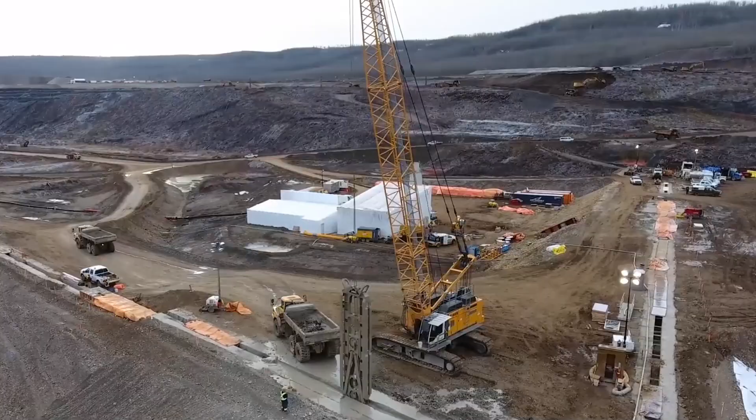Did you know that the Site C Dam in British Columbia is set to reshape an entire valley and flood over 5,500 hectares of land, all in the name of clean energy? This $12 billion megaproject will harness the power of the Peace River to generate 1,100 megawatts of renewable energy, enough to power 450,000 homes or over 1.7 million electric vehicles each year.

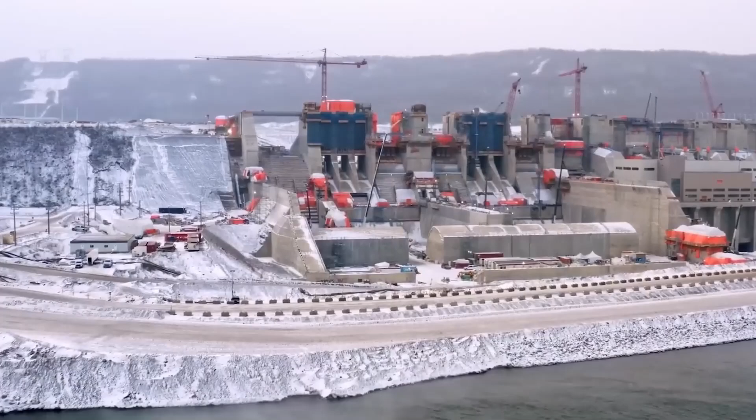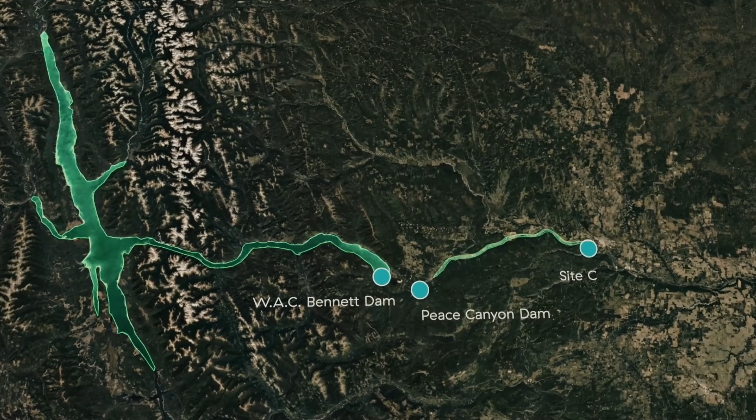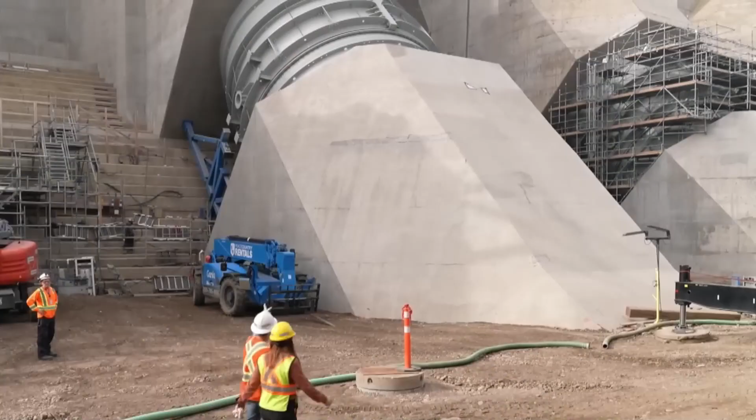It's one of Canada's largest infrastructure projects, involving nearly 4,800 workers and the construction of a massive earth-filled dam towering 60 meters high. With a reservoir stretching 83 kilometers, these monumental efforts could change the way British Columbia generates electricity for generations. But with skyrocketing costs, significant environmental concerns, and strong opposition from local Indigenous communities, is this ambitious project truly worth the price? And what will its impact be on the future of energy and those who live near its turbulent waters? Let's find out.

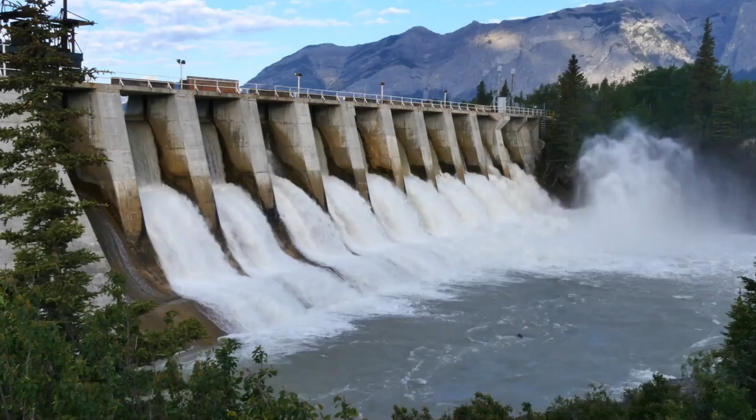Canada has long relied on its powerful rivers to drive progress. Hydroelectricity has kept the lights on, powered industries, and shaped the country's energy landscape. In British Columbia, the mighty Peace River has played a crucial role in this story. For decades, its waters have been harnessed by massive dams, each one helping to fuel the province with clean, renewable power. But as BC moves into the future, is this energy from these past projects enough to sustain its growing needs? The answer is no, not anymore.

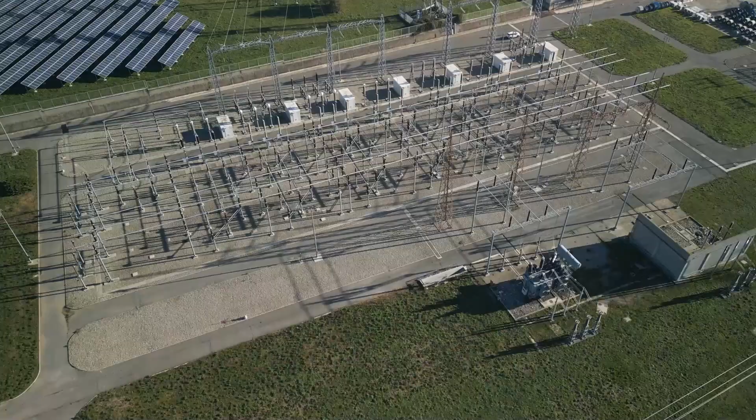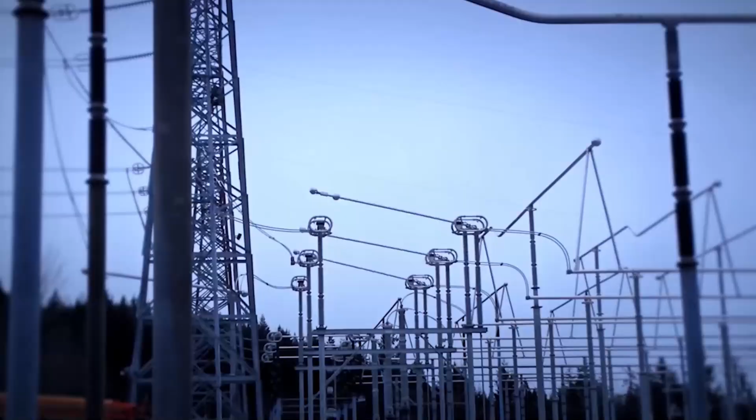British Columbia's population is surging, with over 1 million new residents expected in the coming years. More homes, more businesses, and an explosion of electric vehicles all mean one thing: an unprecedented demand for power. The W.A.C. Bennett and Peace Canyon dams built the foundation of BC's hydroelectric success, reshaping entire valleys to generate energy. But that legacy, while remarkable, isn't enough to meet the energy needs of tomorrow. The province needed a new solution, a bold step forward.

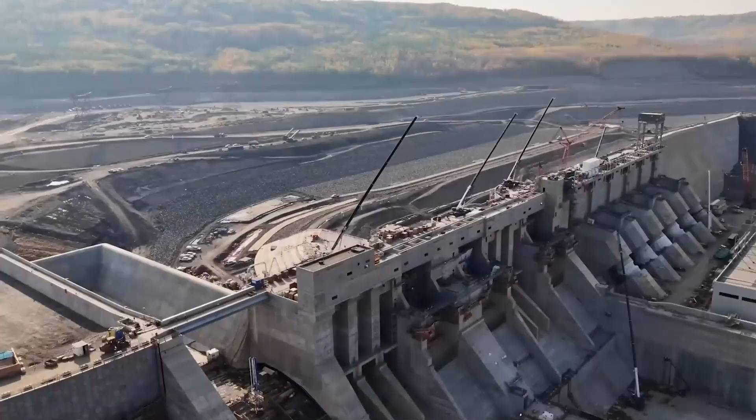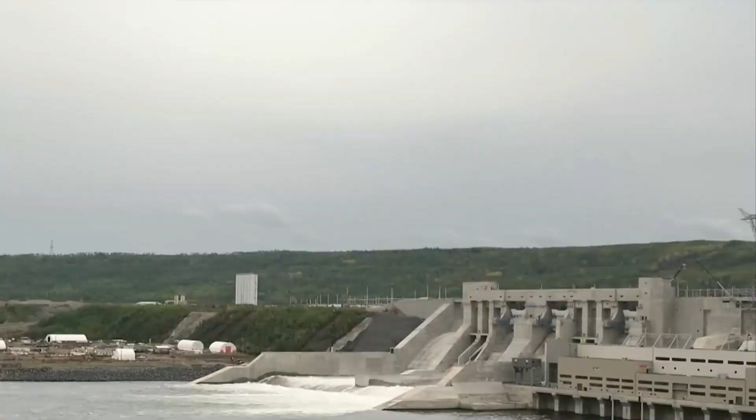That's where Site C comes in. The dam is seen as a cornerstone for the future, a project that will add 1,100 megawatts of capacity and produce thousands of gigawatt hours of electricity every year. With a reservoir stretching over long distances, the dam is expected to boost BC's energy grid by nearly 8%. The proponents say that this dependable power is essential to support not only existing infrastructure, but also the emerging needs of modern society. But building something so grand is never easy. What does it take to bring this engineering marvel to life?

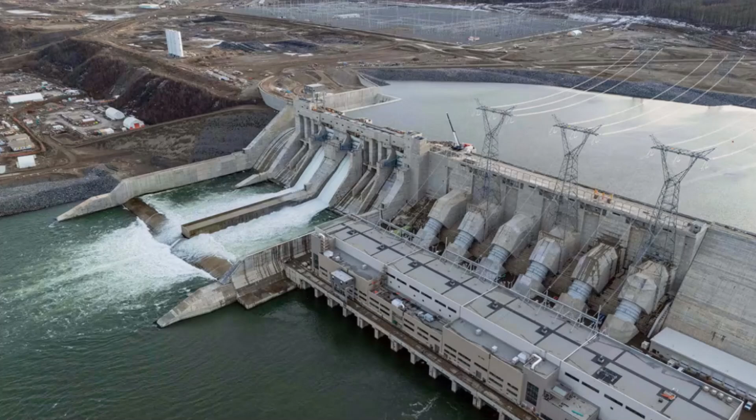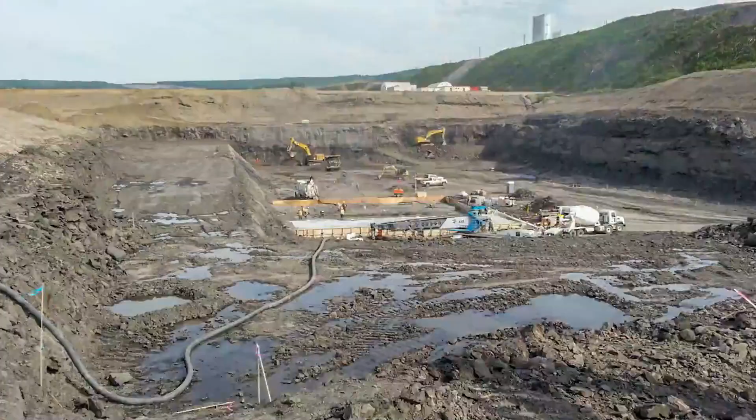Building Site C isn't merely a construction project. It's a transformation of the landscape designed to harness the power of the Peace River. This won't be just any dam. It's an earth-filled structure stretching over 1,050 meters and soaring 60 meters high, equivalent to a 20-story building. And behind it, a vast reservoir snaking through the valley for 83 kilometers, capturing the raw power of the Peace River. But how do you even begin constructing something this massive?

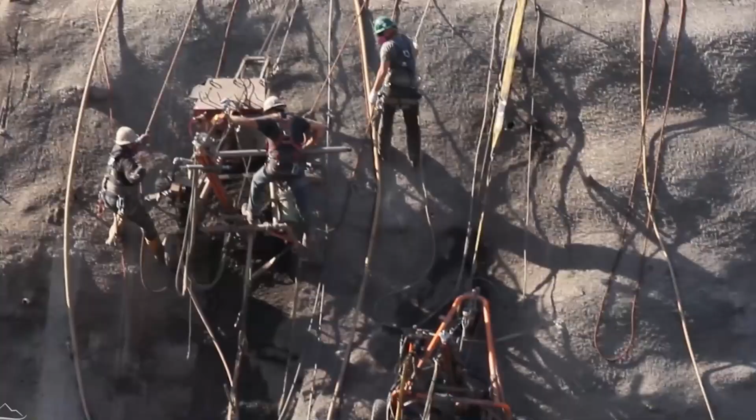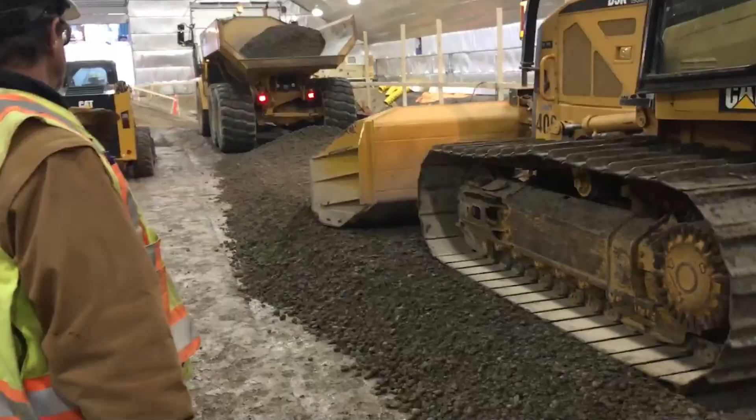It starts with sheer scale. Thousands of tons of concrete, millions of cubic meters of earth, and countless hours of labor are being poured into this site. Crews are working around the clock, clearing dense vegetation, forging temporary roads, and securing safe pathways for the relentless movement of heavy machinery. At peak construction, nearly 4,800 workers, both local residents and specialized laborers from across the region, are on site, each playing a role in bringing this colossal vision to life.

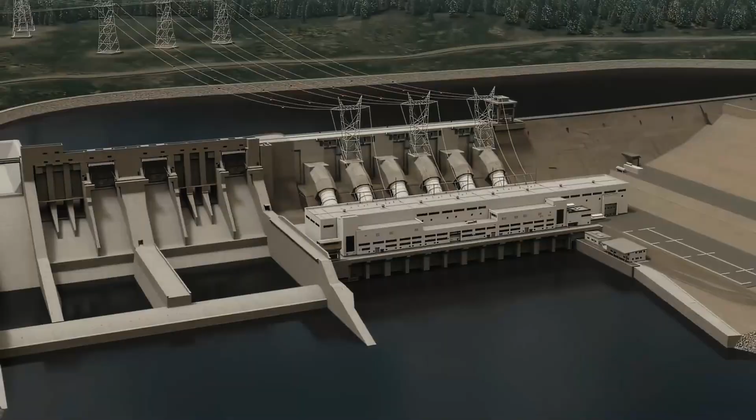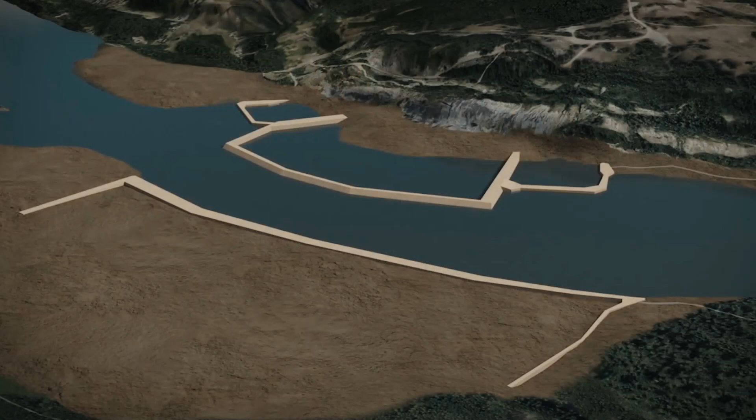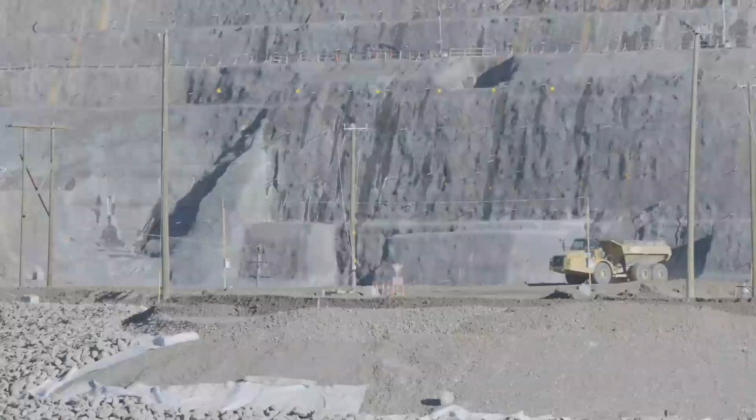The sheer effort required to bring the Site C Dam to reality is staggering. Two temporary cofferdams and diversion tunnels were installed to reroute the Peace River and allow essential work on the dam's foundation. These diversion tunnels, each nearly 800 meters long and lined with concrete, ensure that the river's force is safely managed during construction. Preparation for the earth-filled dam includes relentless excavation and the transportation of millions of tons of materials, aided by innovative conveyor belt systems that minimize environmental impacts and reduce fuel consumption.

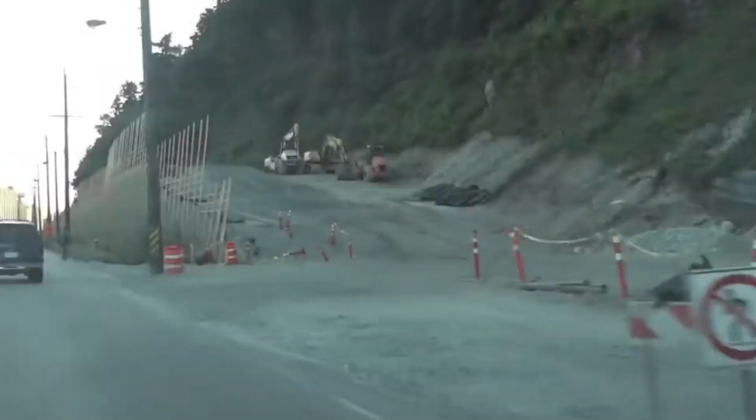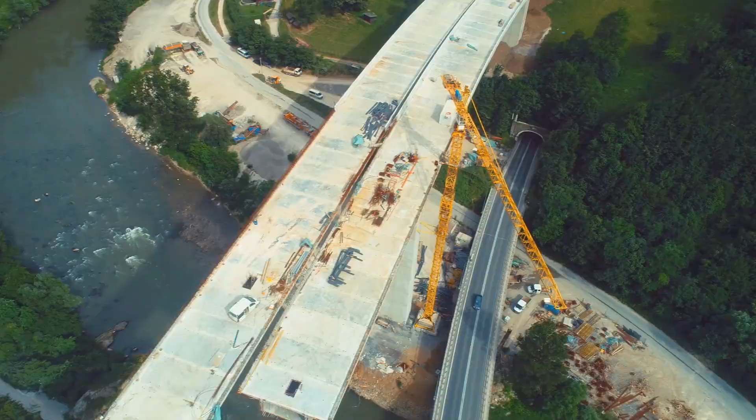Accommodations for the workforce have been built right on site, with facilities designed to house up to 1,600 workers, ensuring that laborers remain close to the action. Key construction projects have also involved drastic changes to regional infrastructure. Highway 29, for instance, has been realigned over several segments and supported by the construction of multiple new bridges, all to maintain seamless connectivity during the project. A robust network of transmission lines featuring state-of-the-art 500 kilovolt technology has been installed to integrate Site C with BC Hydro's grid, ensuring that the power generated flows safely and efficiently to homes and industries.

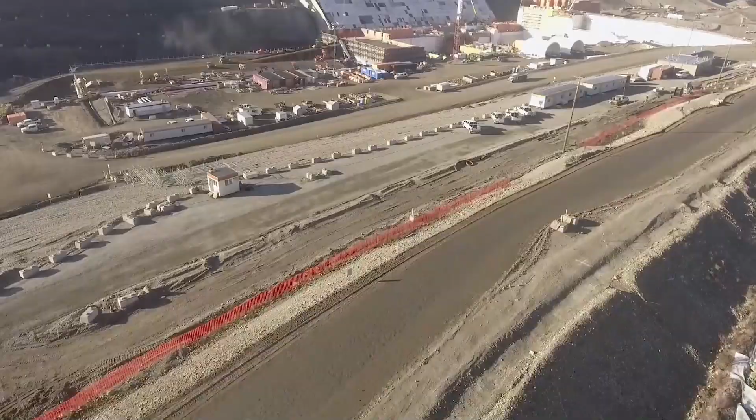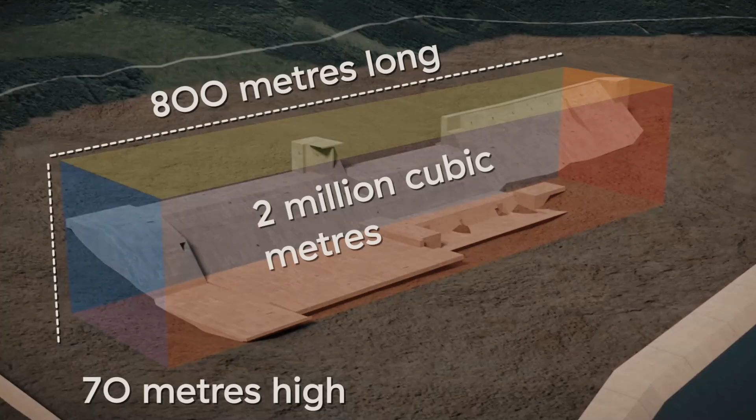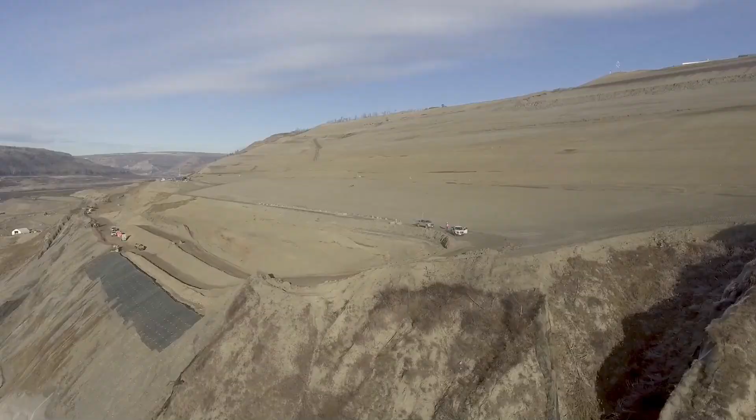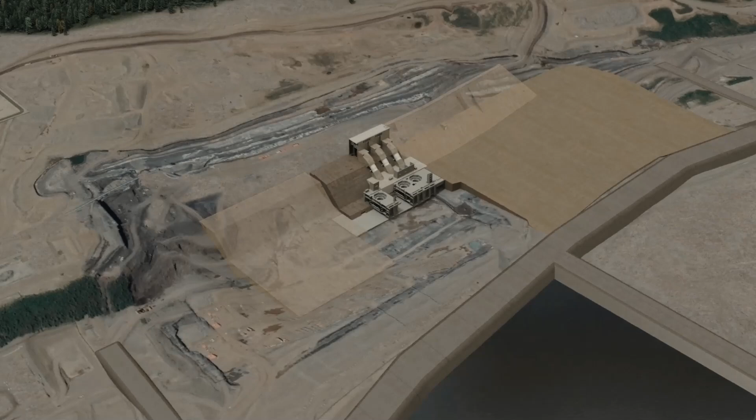The answer lies in a bold and unconventional approach. The most unexpected part of the solution lies in the L-shaped design of the dam, a choice that breaks away from traditional linear layouts typically used in large earth-filled dams.

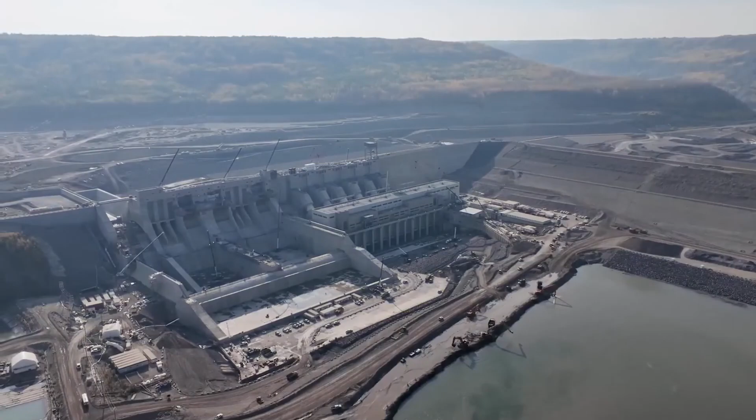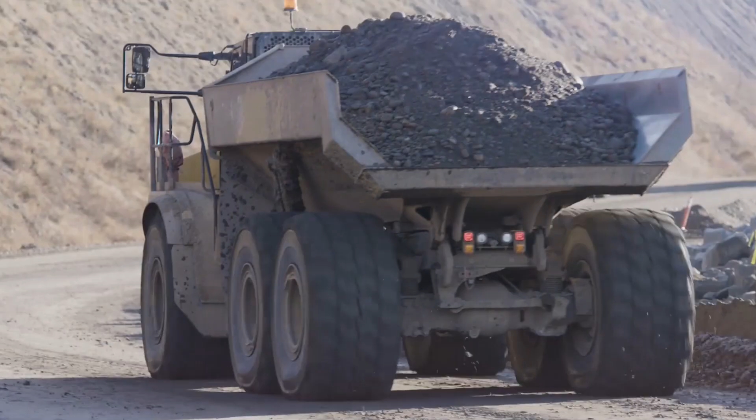Site C's engineers realized that straight-across construction might exacerbate instability given the weak geological conditions. The L-shape, with its 90-degree turn, not only adapts the dam to the valley's contours, but also redirects pressure away from the particularly risky areas of the valley walls that are rife with unstable zones, ensuring better stability and structural integrity.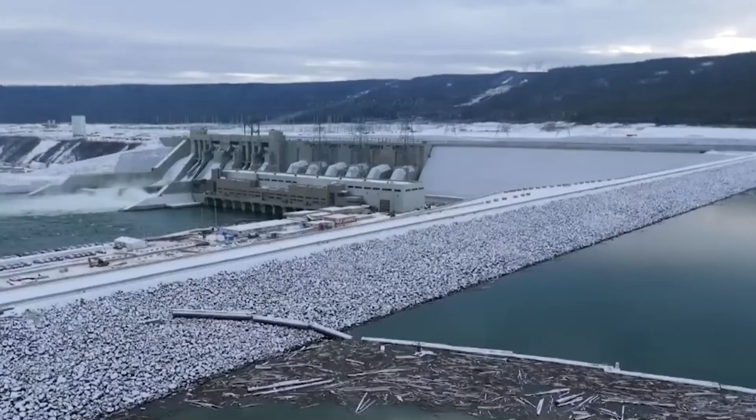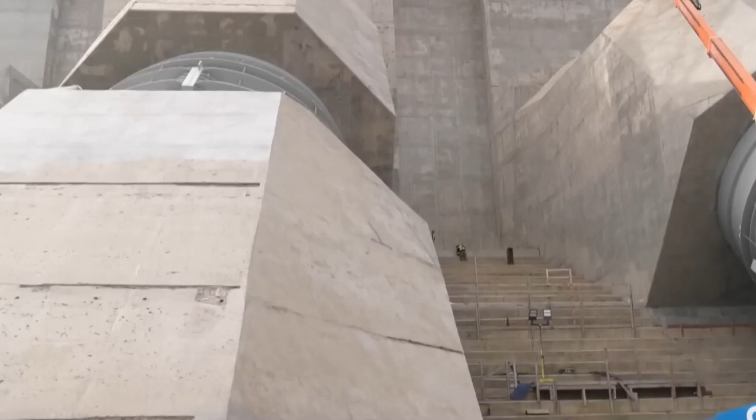To counteract weak shale, extensive geotechnical investigations were carried out before the final plan was approved. BC Hydro's team drilled into the earth, uncovering unstable bedding planes that required serious redesign work. The L-shape addresses these fragilities by spreading the load more evenly across the valley and incorporating massive concrete buttresses. This unique approach allows for a more robust structure capable of withstanding seismic risks and the significant force of the reservoir.

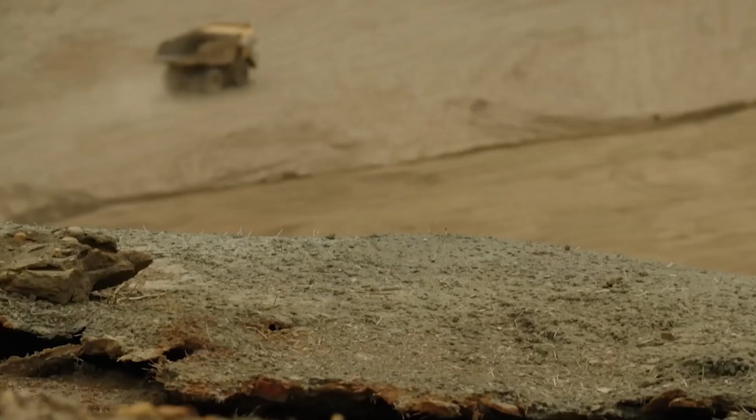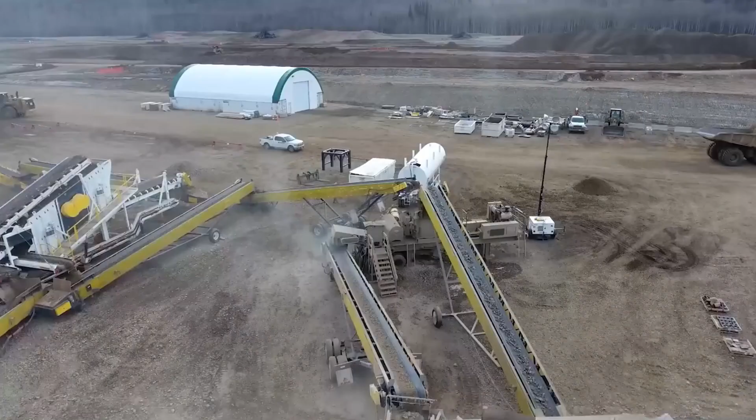And then there's the cost. What started as a multi-billion-dollar project has ballooned to over $12 billion, and the numbers keep climbing. Every unforeseen challenge, whether it's shifting terrain, supply chain delays, or inflation, adds another strain to the budget. How do you keep a project this massive on track?

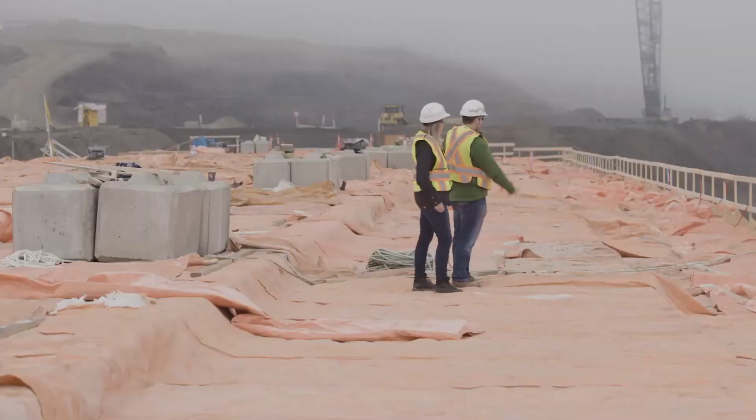The answer? A delicate balancing act between ambition and caution. Engineers and project managers work around the clock, relying on state-of-the-art machinery and cutting-edge innovations like GPS tracking to minimize waste and optimize fuel use. Every dollar saved is a victory in a project where costs are constantly at war with progress.

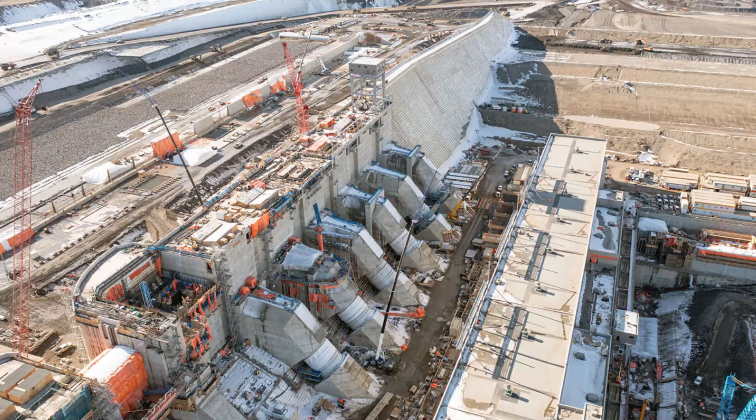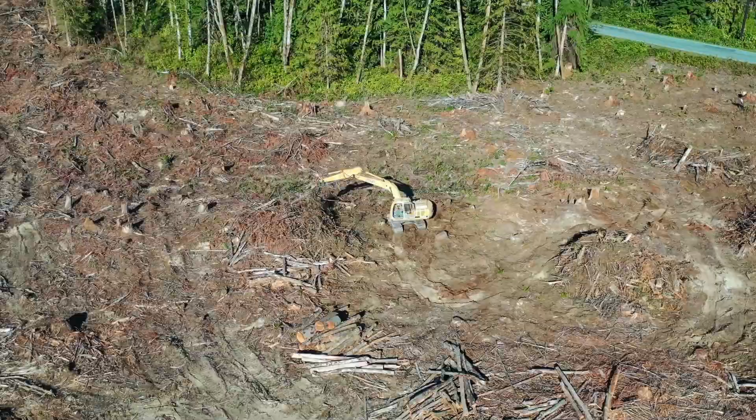Yet every major construction project demands sacrifices. The natural landscape is altered and entire sections of the valley will be transformed into a reservoir. This transformation is not without environmental costs. Trees are cleared, habitats disrupted, and the natural flow of the river is forever changed. Engineers and builders are pushing the limits of what can be achieved, but they must also heed the call to protect the environment around them.

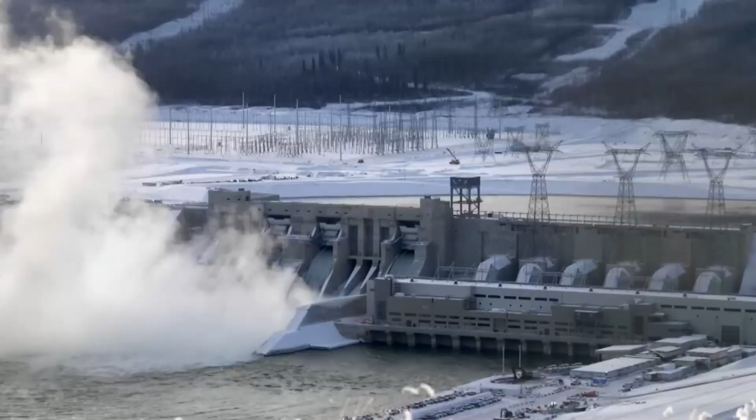With so much at stake in the construction phase, it's no wonder that controversy surrounds this massive project. For Site C, the opposition is loud and deeply rooted, with Indigenous communities, environmentalists, and local residents all raising concerns.

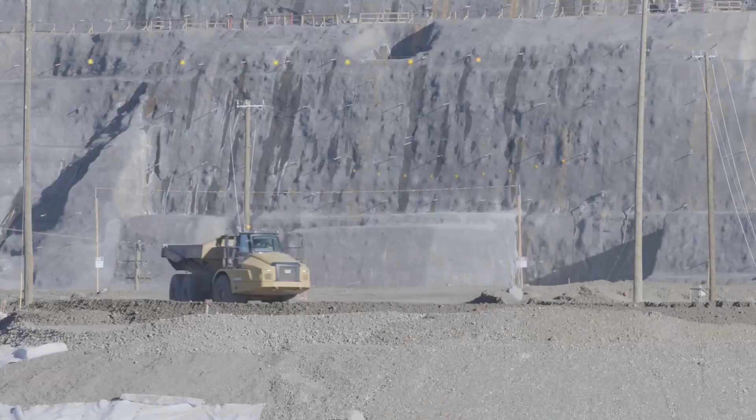For Indigenous groups, it's more than just land. It's history, culture, and identity. The Peace River Valley has been home to them for generations, a sacred connection passed down through time. Now, with large areas of traditional territory set to be flooded, many fear that a way of life will be lost forever. Is securing future energy worth the price of erasing centuries of heritage? That's the heart of the debate.

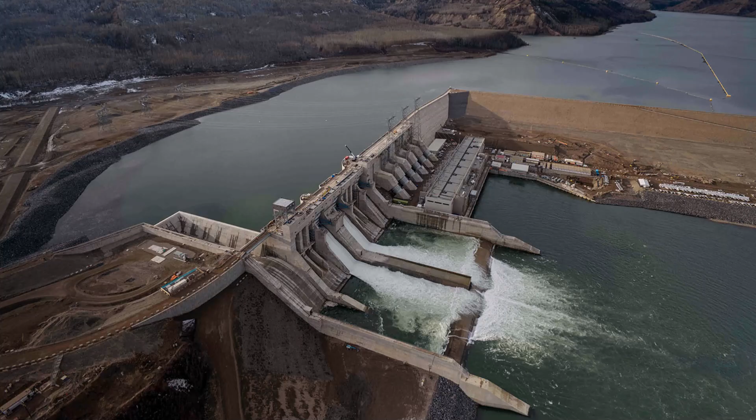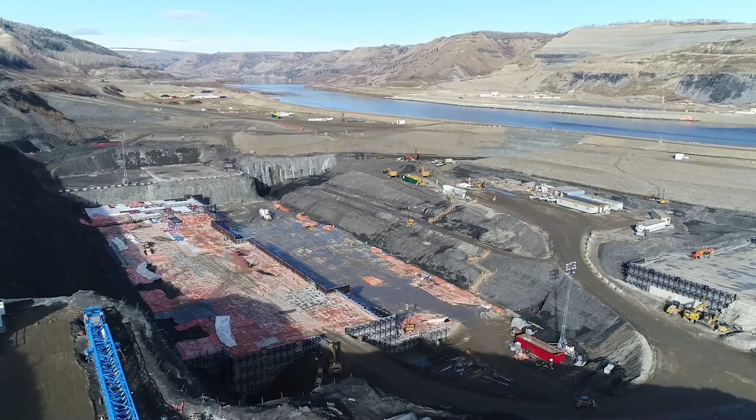Then there's the environmental battle. Transforming a free-flowing river into a stagnant reservoir is an ecological gamble. Critics warn that the dam could disrupt fish habitats, alter natural water patterns, and threaten wildlife that depend on the Peace River. Supporters call it a necessary sacrifice for clean energy, but opponents argue that the cost to nature is too high. Can a project truly be called green if it comes at the expense of the environment itself? The debate rages on with no simple answers, just tough choices and lasting consequences.

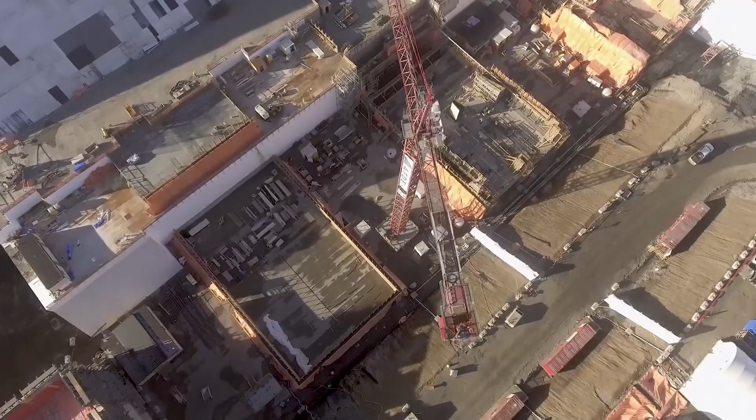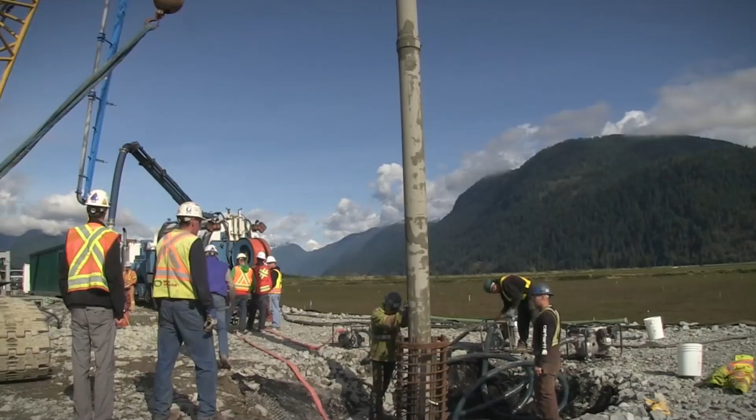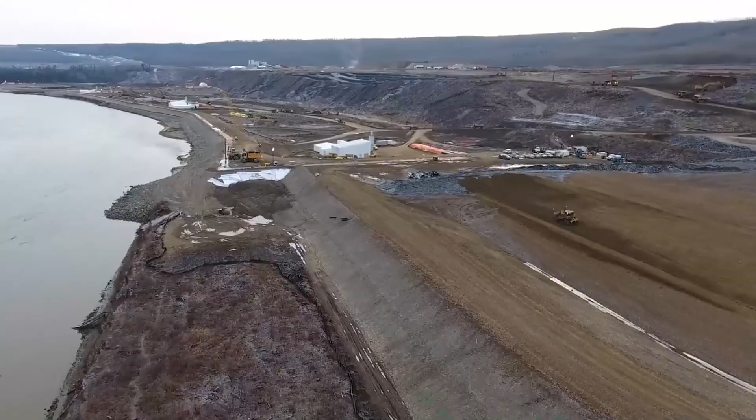But beyond the engineering challenges and environmental concerns, there's another looming issue: the cost. As expenses skyrocket, critics are asking a tough question: will this investment truly pay off? The dam is meant to provide long-term energy security, but with costs already doubling from initial estimates, many fear that the financial burden could fall squarely on taxpayers. The fear is that once the dam is complete, the financial burden could become a heavy weight on the local economy and the province as a whole. Money spent today might come back as a drain on resources tomorrow, leaving communities to deal with the fallout.

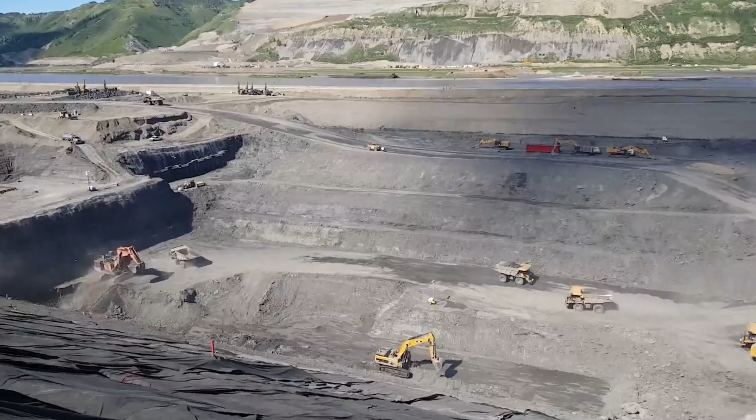The debate is not one-sided. Supporters of the dam argue that its ability to produce a steady, reliable flow of power is crucial for future growth. They point to the need for dependable energy to back up more intermittent sources like wind and solar power. Yet every point in favour is met with counterpoints of environmental degradation, loss of cultural heritage, and soaring costs that could threaten the province's financial health.

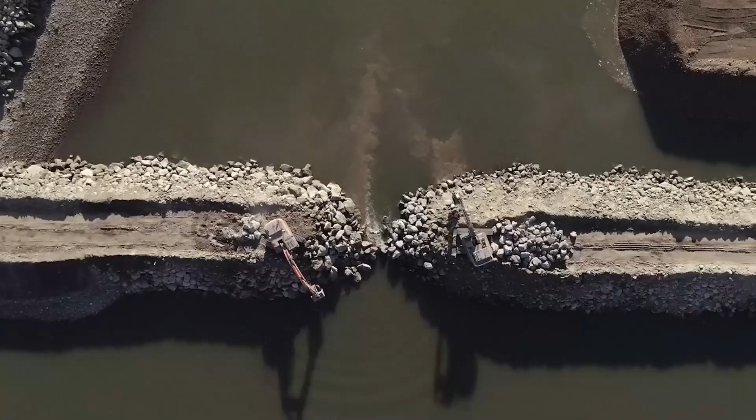As the debate rages on, the eyes of the province and the nation turn to what lies ahead. What will the future bring for Site C?

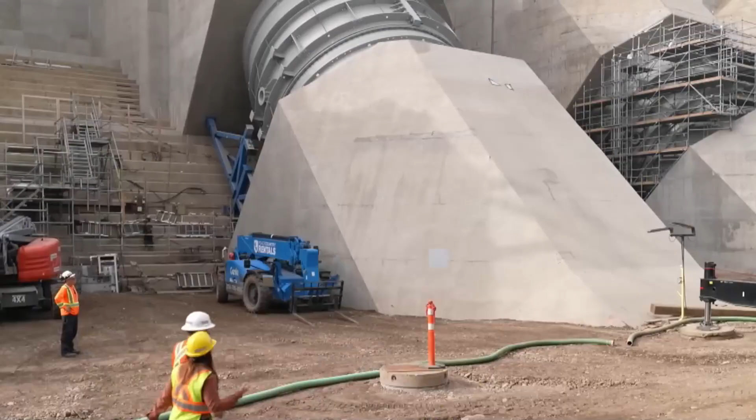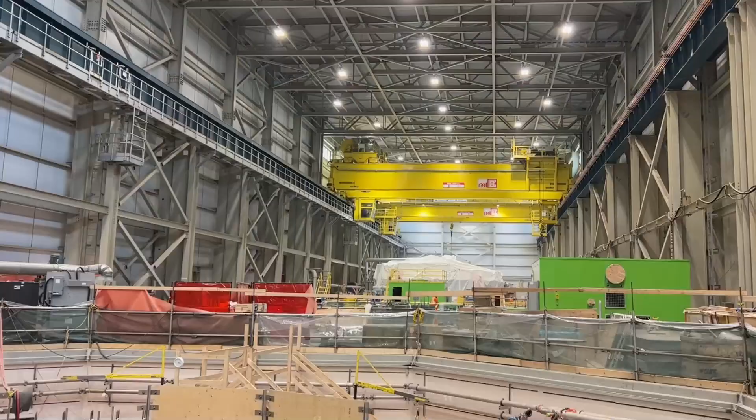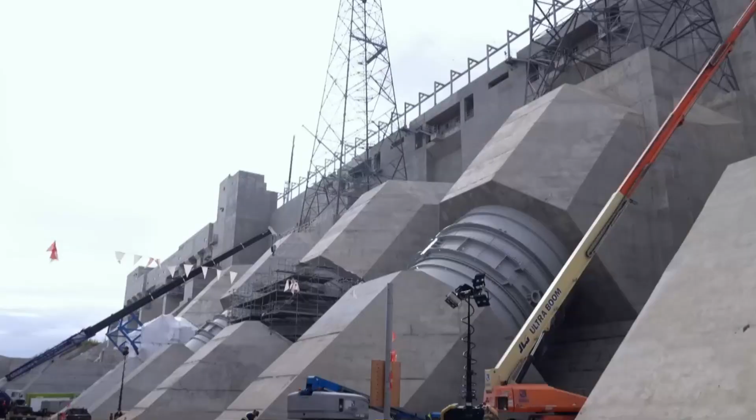Site C is now in its final stages, with major construction milestones being reached. The dam's powerhouse, transmission infrastructure and reservoir filling are progressing steadily. Key components like the generating station and spillways are nearing completion, and BC Hydro has confirmed that the project remains on track for its 2025 operational start. Despite previous cost overruns that pushed the budget to $16 billion, far beyond initial estimates, the project has moved past its most challenging phases, including complex geotechnical work on the dam's foundation.

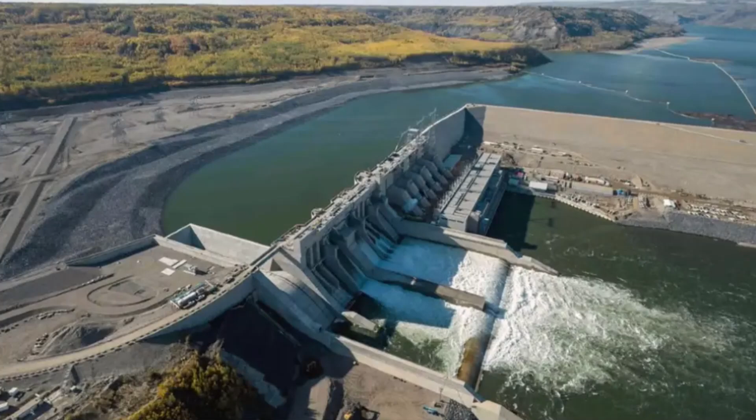As Site C nears completion, the debates over cost, impact and necessity won't be fading anytime soon. So when the switch is finally flipped, will it mark a new era of sustainability or serve as a cautionary tale of ambition gone too far?